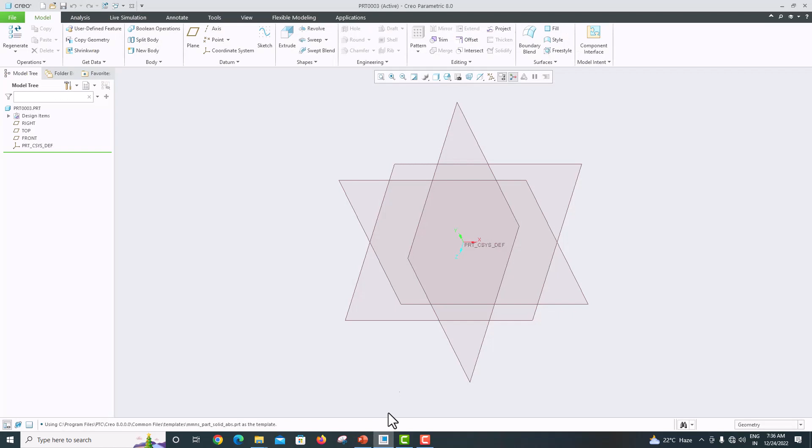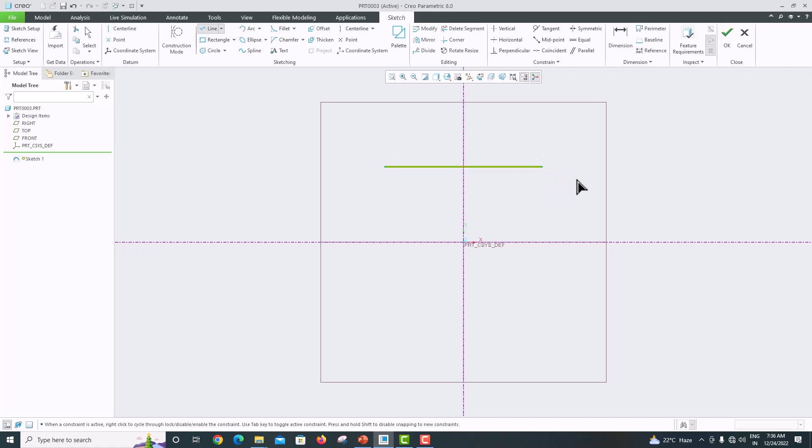First I am going to extrude this feature. For this, go here, take this front plane, sketch view. I am just drawing a center line. Press the roller to confirm. Now draw a symmetric line, press the roller to confirm, again press the roller to confirm.

Now this line I have drawn, the dimension is 56. While drawing any complex line or complex 2D geometry, first create a single line and specify the dimension, then start drawing the remaining parts. This dimension is 56, and this height is 15.

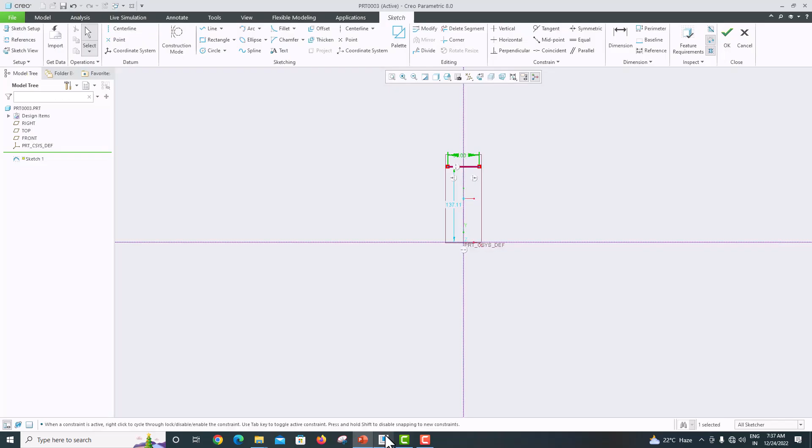Now go to fit screen. 56, this is 15. Now go to freehand sketch and draw the model. Take the line, connect this point, connect one, join this one, press the roller to confirm, again press the roller to confirm.

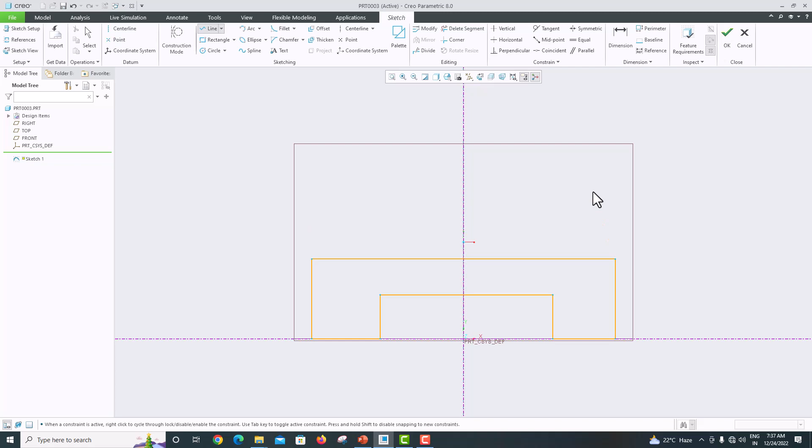Now these two lines are equal. For that, select this point, these two are equal, again confirm it, go to select this one and this one is equal.

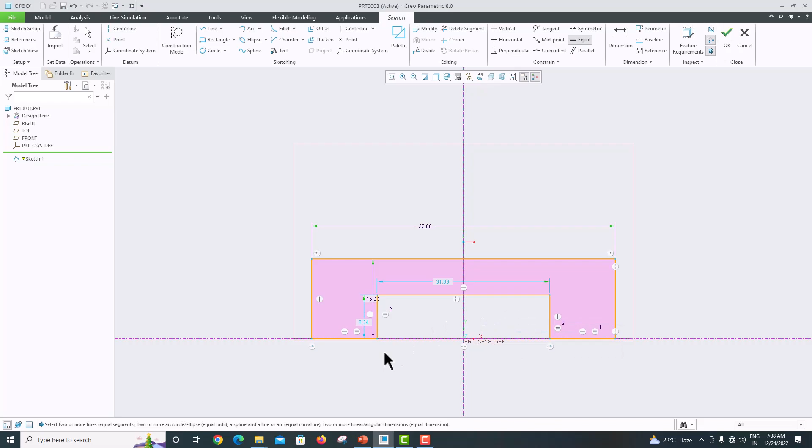Now go to the model, this height is 5 and this distance is 12. Here this height is 5. Go to dimension, this distance is 12.

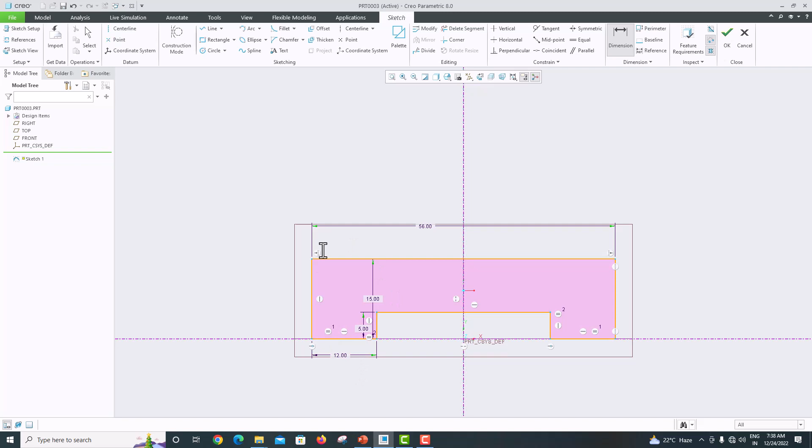Now every dimension we have specified, just click OK, rotate, go to the sketch model. The extrusion length is 75. Go here, go to extrude, change into symmetric. This distance is 75 mm. Press enter and click OK to confirm.

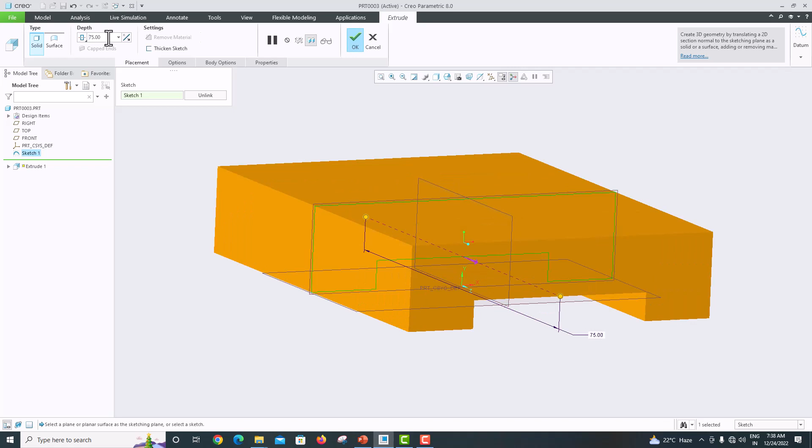Now we have modeled this one. Now go here, we just want to model this cylinder. For that, we don't have any reference surface here. We just want to move a datum plane from here to here for the distance of 63.

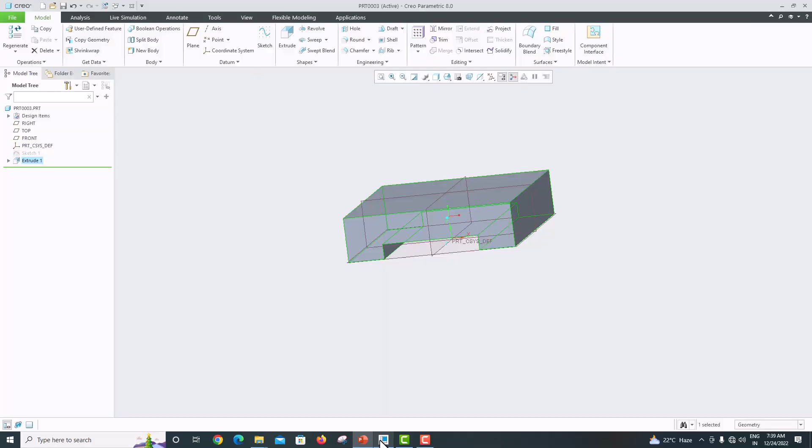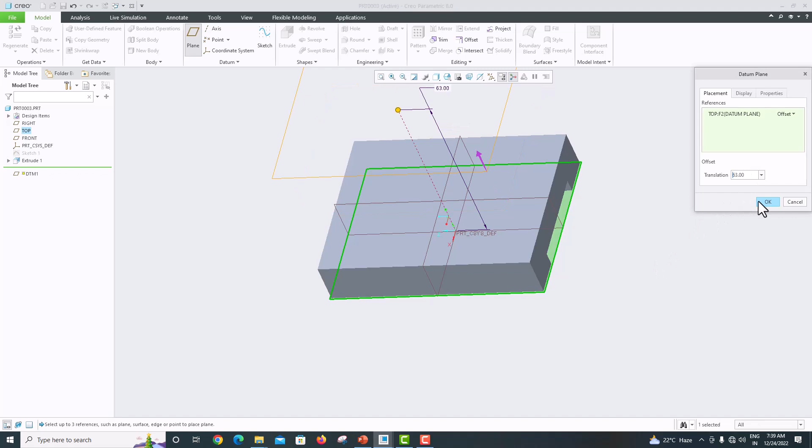Go here, we have a datum plane at the bottom. We just want to move this datum plane to 63 distance. For that, select this plane, go to plane, this distance is 63, press enter, again click OK. Now we have moved our datum plane here.

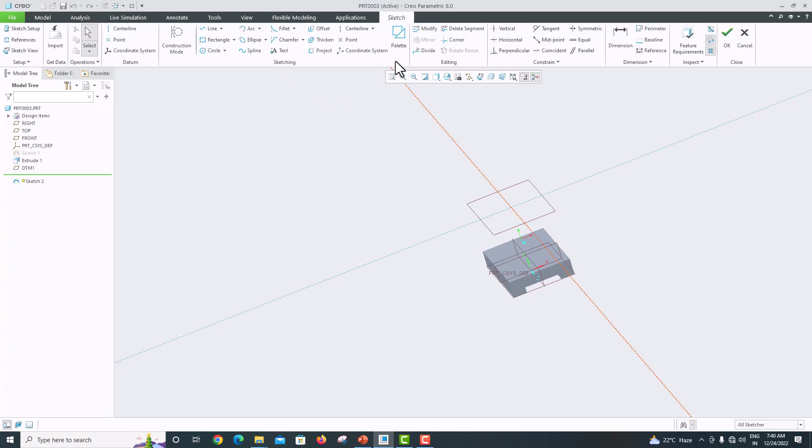Go here, yes, we have moved. Now select this plane, go to sketch view. Now we just want to draw a cylinder here, just fit to screen, go to circle, center line, first circle and second circle, press the roller to confirm.

Now go to the model, inner diameter is 22 and outer diameter is 36, the extrusion length is 25. Go here, inner diameter is 22, outer diameter is 36, this distance is not specified, they have specified a distance of 100 from the edge to the center line.

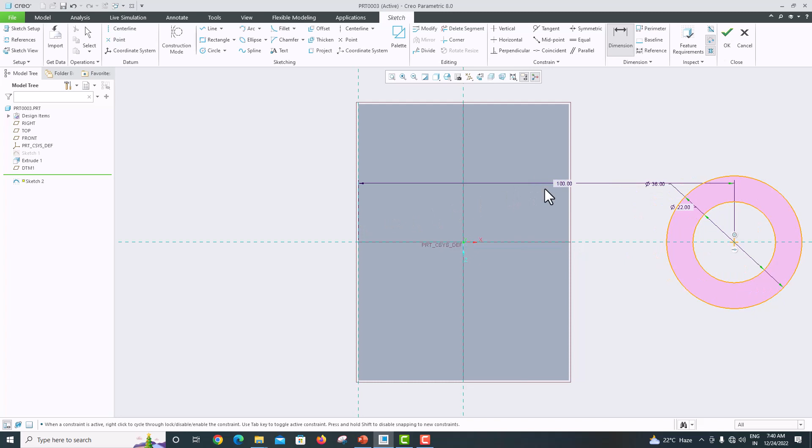Go to dimension, this point and this edge, this distance is 100. Click OK. Now just go to extrude, change the direction. This distance is 25 mm. Press enter and click OK to confirm.

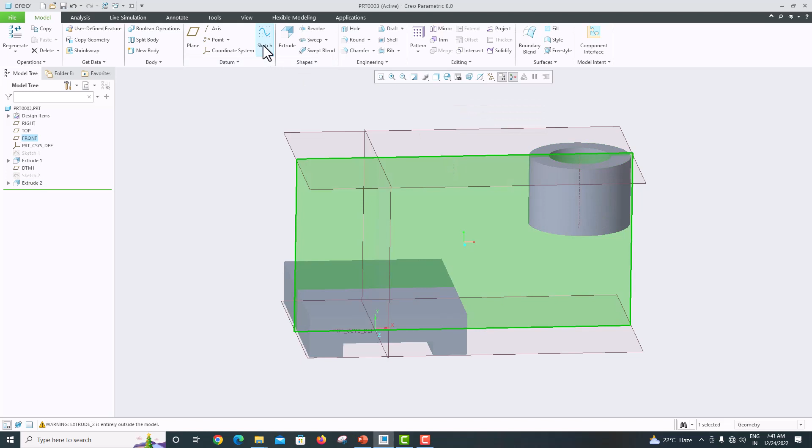Now we have done this one. Then we just want to make this rib. For that, go to model, select this midplane, go to sketch, sketch view. First we just take the reference for your model.

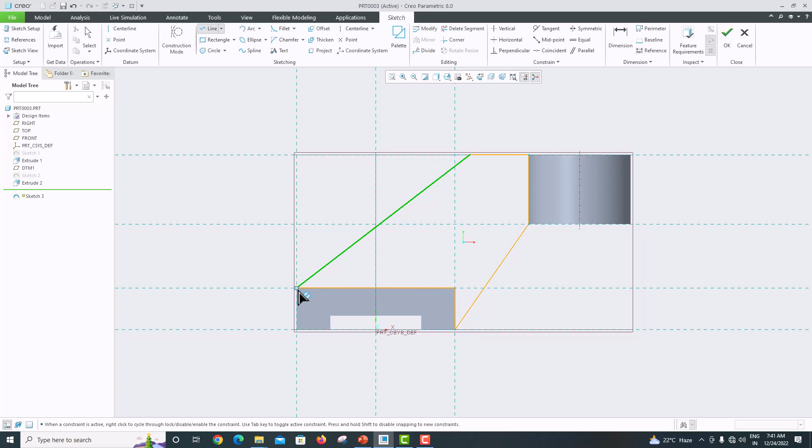Close, go to line, join this one here, here, here, and connect this one and press the roller to confirm. Again press the roller to confirm.

Now we just want to specify the dimension. For this distance is 36. Go here, go to dimension, this point axis to this point is 32. Remaining are connected. Now go to the model, again check this distance is 36.

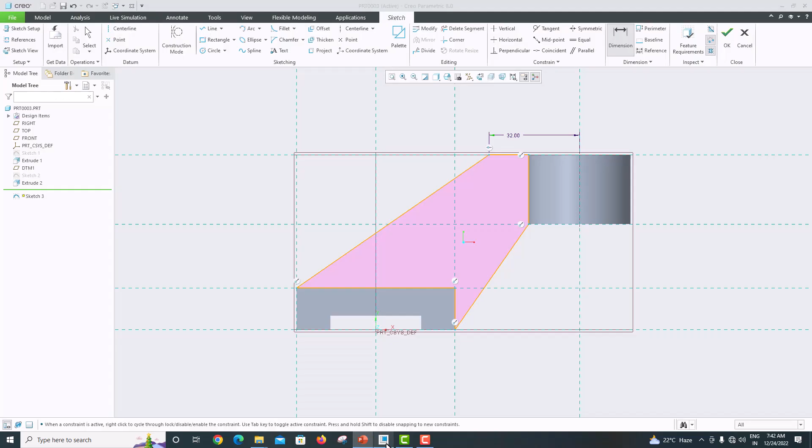Now we are done, just click OK, go to extrude, symmetric, go to the model. This thickness is 12 mm. Press enter and click OK.

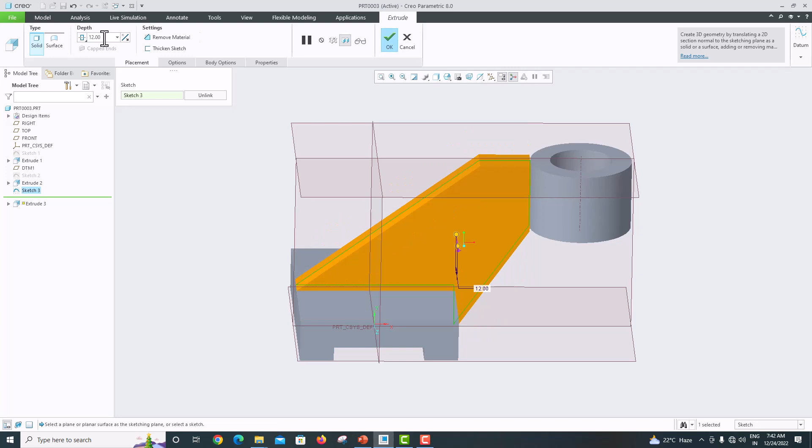Now you check here, there is a gap between this edge. This has to be closed. For that, go to sketch, edit sketch, go to the front view, go to line, just extend this line into some distance and close it and click OK to confirm.

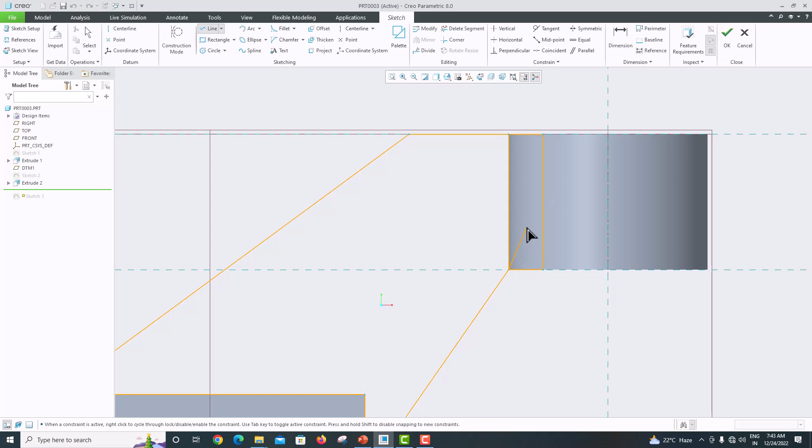Again click OK to confirm. Now just rotate and check. This line should not go further. Change this into 5. Okay, now go to delete segment, delete this segment, click OK. Now again click OK. Now you see the extrude updated automatically and this gap is also filled.

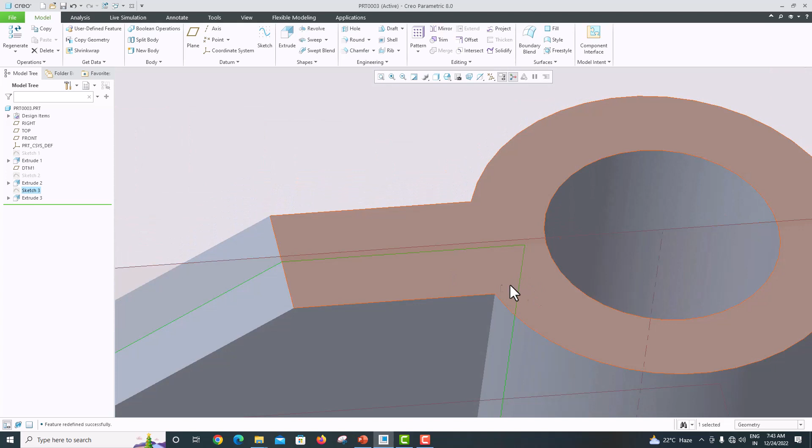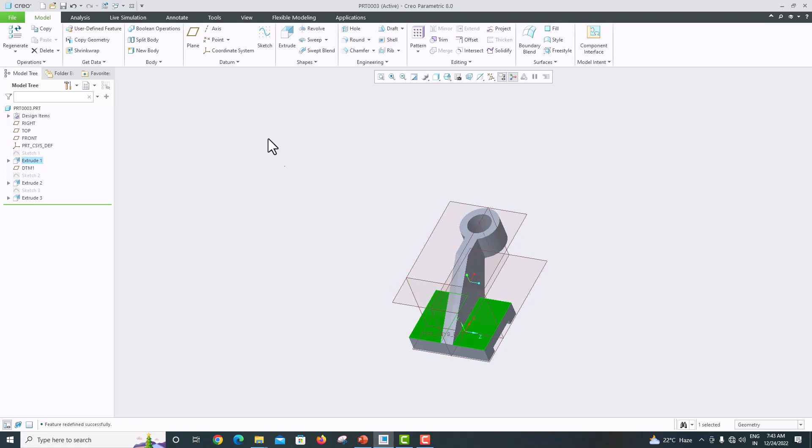Now go to the model. Finally we just want to make 2 holes of diameter 12. Okay, for that select this surface, go to sketch, sketch view, take the reference of center line and this bottom edges.

Just close, go to circle, place a circle here and click. Again place a circle here. Here it shows equal diameter. Yes, click OK. Press the roller to confirm.

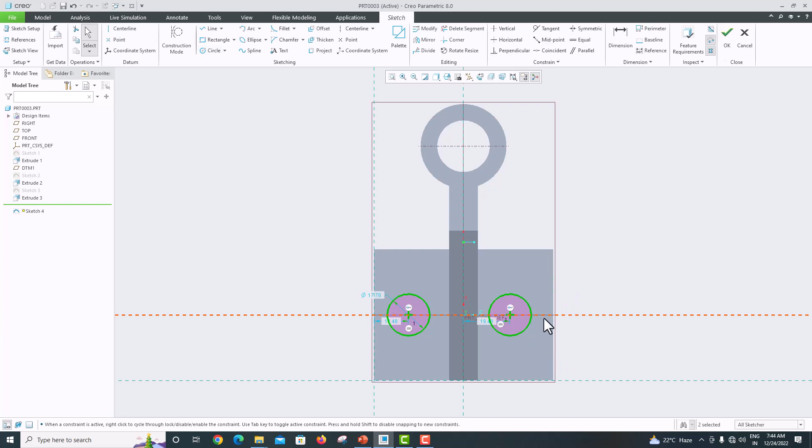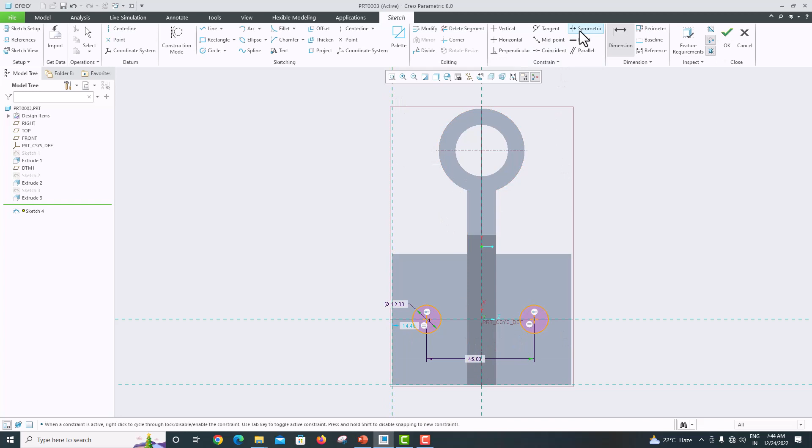Now go to dimension. The diameter is 12, and this is 12, and the center distance we just want to specify as 45 and this has to be symmetric. For that go to symmetric, select this point, select this point and select this mid one.

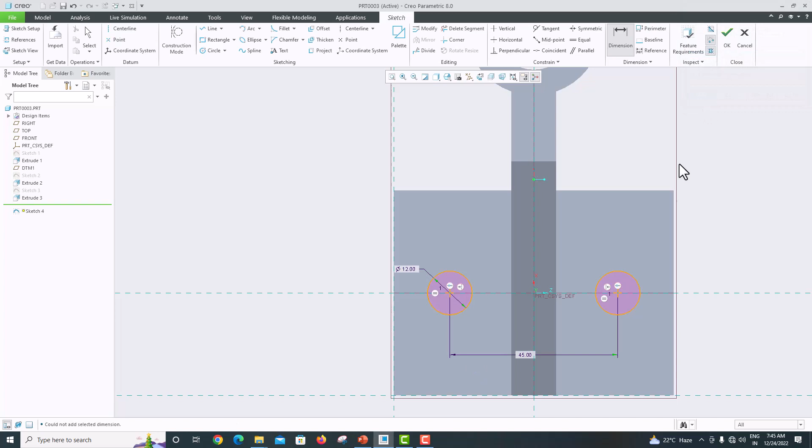Now this is symmetric. Now one more dimension is there, that is this 28. For that go to dimension, this distance is 28. Automatically undo it. Now click OK, just rotate.

Now extrude, flip the direction, remove material, change into to next, click OK. Now go to standard orientation. Now hide your planes.

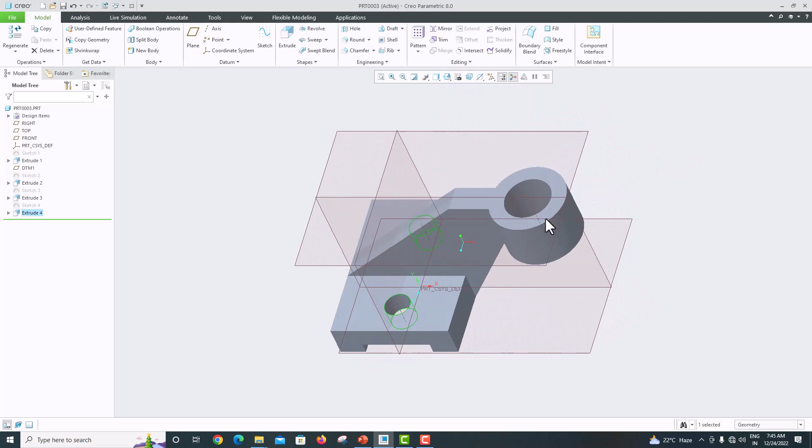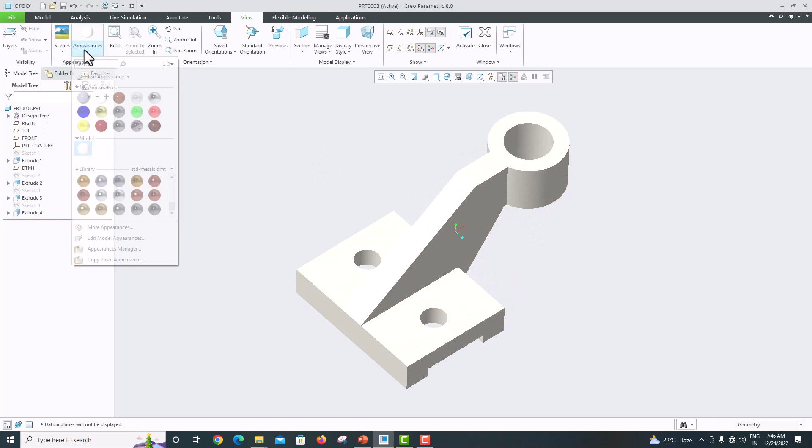For appearance, go to view, appearance, choose any one of the color, select the spot, change some other color, white, click OK. Now we have done our model.